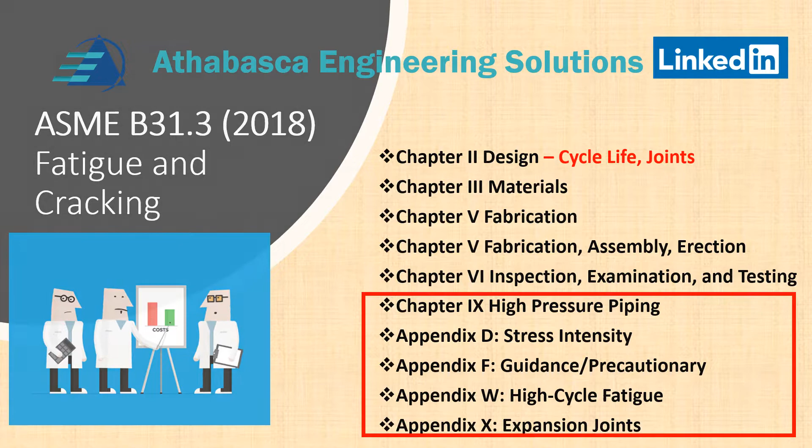So, pressure piping, we continue on with pressure piping, section K300 in 2018. They have a statement saying that for high pressure piping, you can use chapter 9 as an alternative to the rules discussed in chapters 1 to 4, which cover design, materials, and so on. When you dig deep into the specs, high pressure piping is generally defined as ASME class 2500 or higher.

They start off in K300.2 with the definitions. Recall that 300.2 is in chapter 1. Basically, they're saying K300.2 is exactly as 300.2, except for terms relating only to non-metals and severe cyclic conditions. So if you have cyclic conditions, the definition does change. In there, allowable stresses are used in lieu of basic allowable stresses.

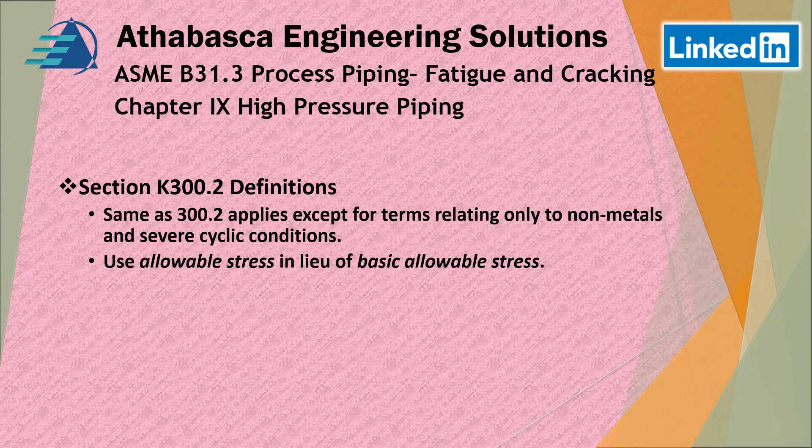So let's look at 304.8, fatigue analysis. When do we do this? What are the exceptions? 304.8.1 says suitability for fatigue analysis, exceptions to the evaluation. Maybe there are some exceptions so we can avoid the extensive work required. So when we have equipment that's duplicate or has a similar operating history, we don't need to do a fatigue analysis. If we have calculations that are very similar and have shown that it works, we can use those calculations. ASME allows that.

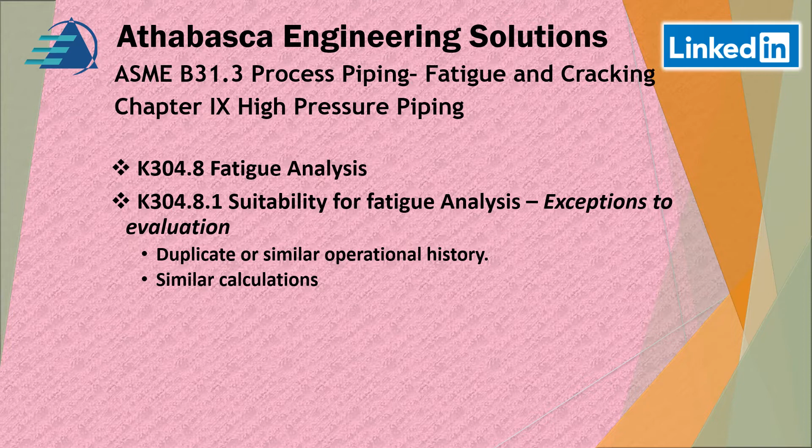On with 304.8. They talk about amplitude of alternating stress. Remember, we talked about if the amplitudes get higher and higher, and if they're not fully reversing, then that could be an issue. So this is what they say.

So you're allowed to go into the boiler pressure code, section 8, division 2, and use the rules there, in particular the design curve from part 2, paragraph 315. This hasn't changed in the last few years, so my reference point is 2018. They want you to follow part 5 for the analysis, or alternatively you can use section 8, division 3, article KD2, which I'm not familiar with, but I am quite familiar with division 2.

For additional considerations, you can use K302.1, but be aware there are a lot of precautions there. Going back to division 3, that's the higher pressure one, and we did some videos about when to use division 2 and division 3 and the issues associated with that. So anyways, we'll continue.

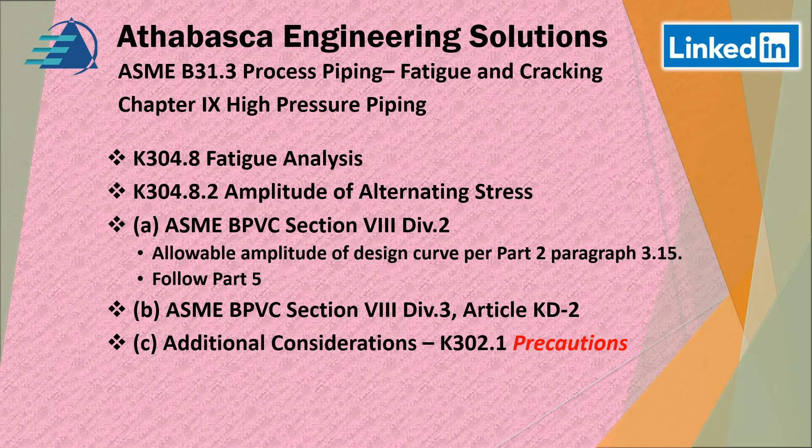So we are going into pressure stress evaluation for fatigue analysis. Straight piping, the stress intensity calculation, this is the calculation that can be used, and it's a modification of your standard hoop stress equation. Then for the stress intensity, you'd follow the ASME boiler pressure vessel code, section 8, division 3.

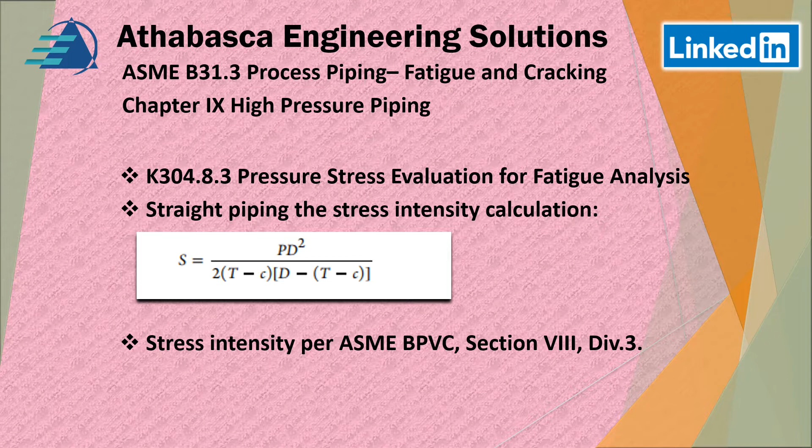The fatigue evaluation by test is an option. The fatigue life of a component may be established by DE, meaning destructive evaluation, in lieu of analysis. But you must follow the criterion in K304.7.2. So this is where you would get a lab involved, build components, and then run them under cycles if it's a complicated design. This is the pressure design of components.

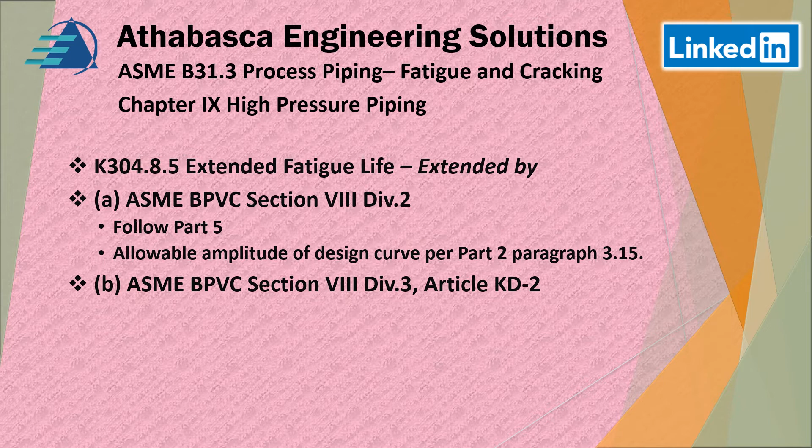So we continue. 304.8.5, extended fatigue life. It's extended by ASME boiler pressure vessel code, section 8, division 2, following part 5, allowable design curve part 2, 315. You can also go and use section 8, division 3, article KD-2.

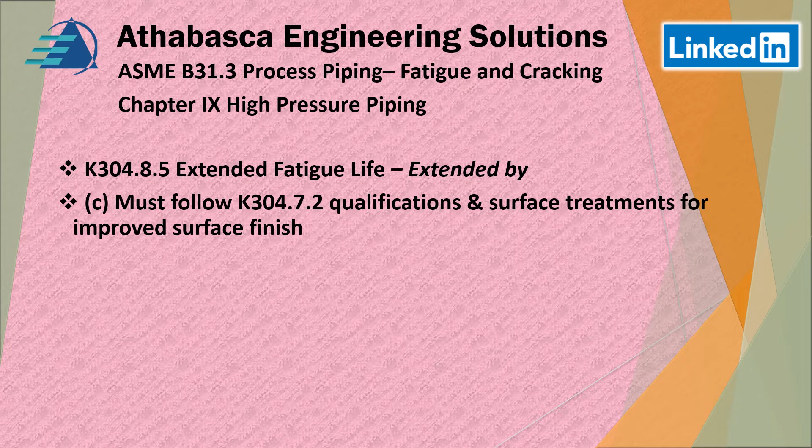You can extend the life by following 304.7.2, qualifications and surface treatments to improve the surface finish. The smoother the surface, the less chance there is of nucleation sites where cracks can begin, the stage 1 cracks. Pre-stressing components is a strategy. Autofrettage, shot peening, you're basically increasing the hardness of the surface, and you only want to do it at that surface, to reduce the chance of a nucleation site happening for a crack.

On the inside of the component, as we talked about in earlier videos, you want your material to have high toughness, but the surface you would like to have a very hard surface. Note that the pre-stressed surface treatments may be reduced due to thermal straining or softening. So you have to look at your application and evaluate whether your surface hardening will be able to handle the type of environment you're in.

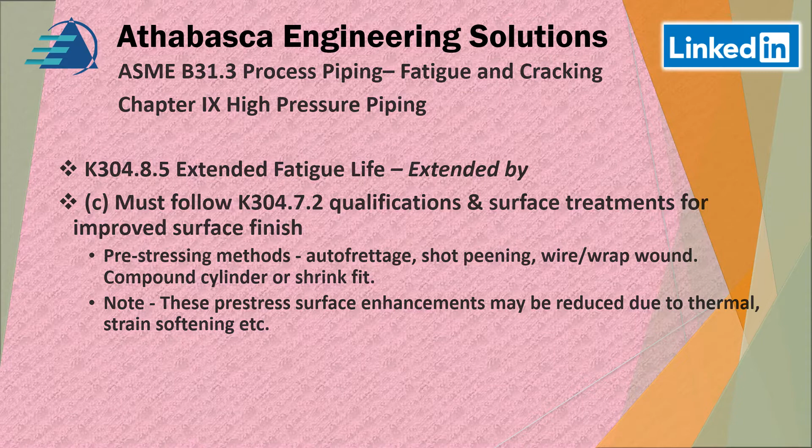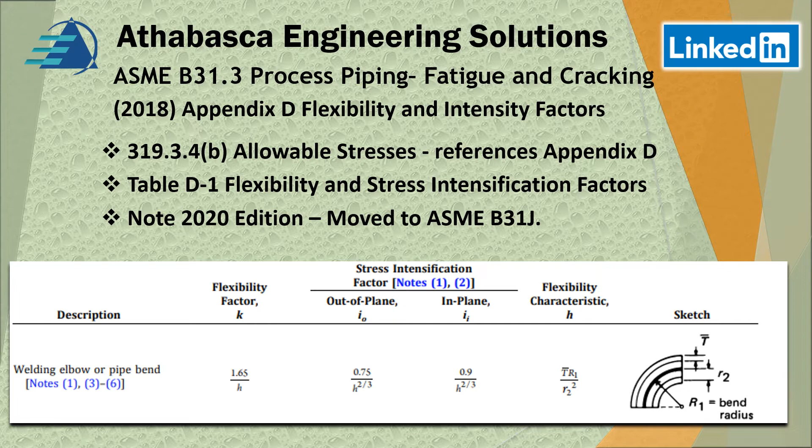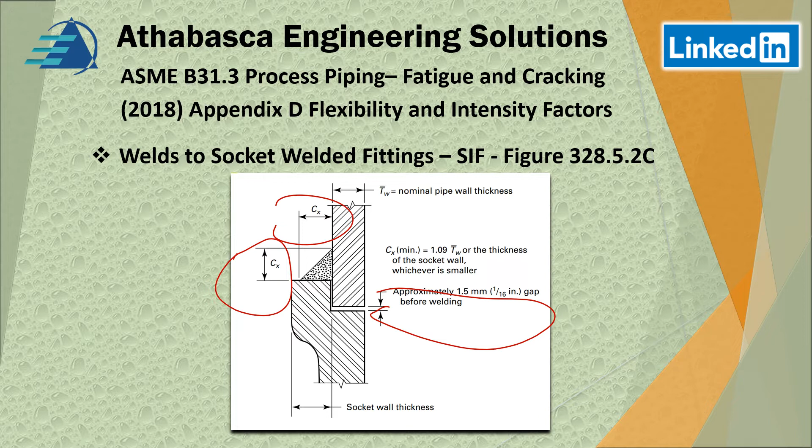Appendix flexibility analysis: welds to socket welded fittings, the stress intensification factor. They really want you to follow certain geometry factors and weld sizes to avoid potential fatigue. For example, you can see gap requirements and certain size requirements, and the legs of the weld are exactly the same size. There's very specific requirements for socket welding to reduce stress intensification factors, which promote fatigue and cracking.

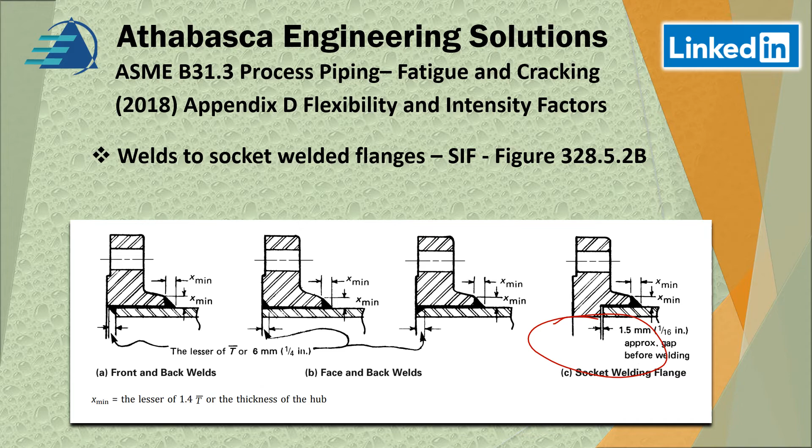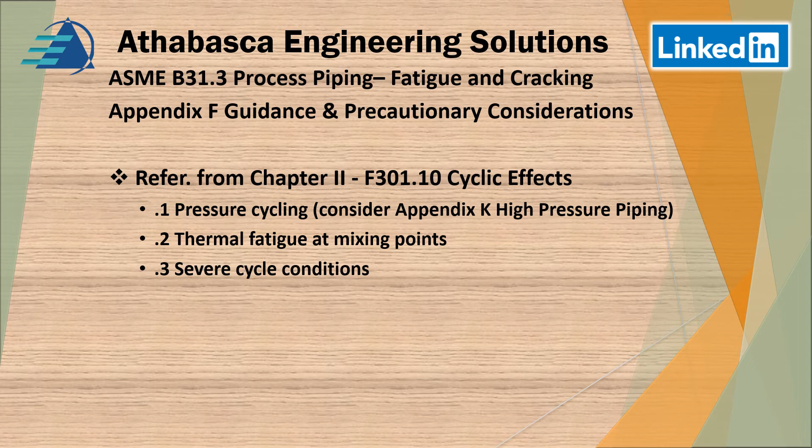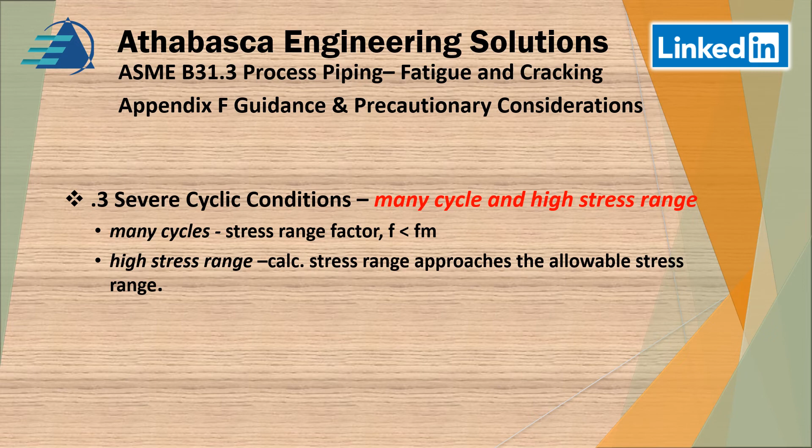Severe conditions have many cycles and high stress range. So when the stress range factor F is less than FM, as discussed earlier, then we have a high stress range calculation, where the stress range approaches the allowable stress range.

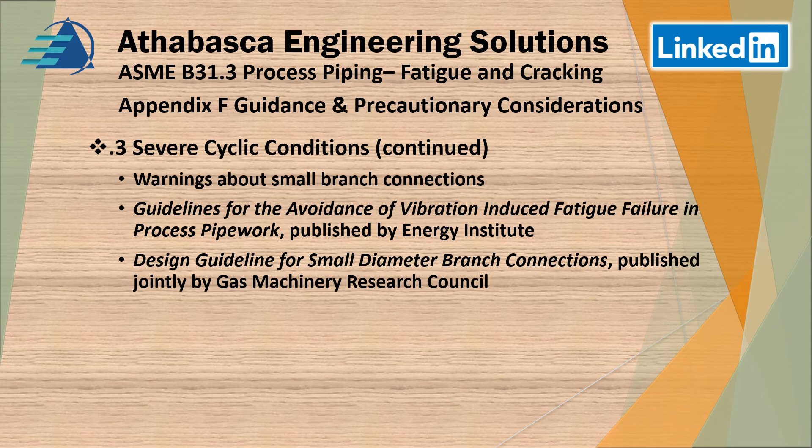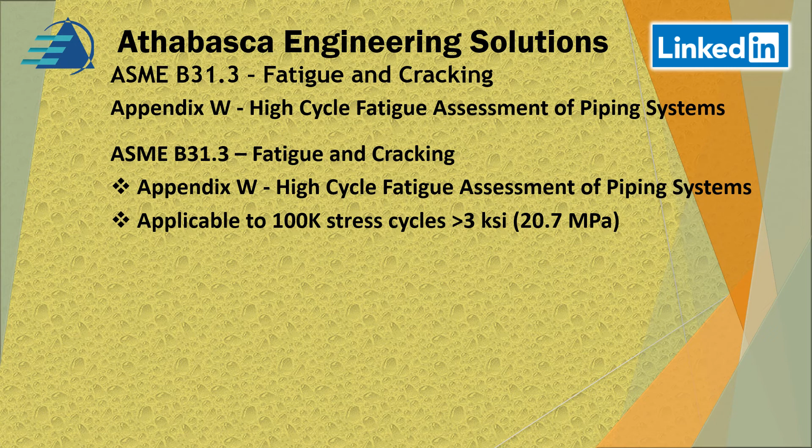Appendix W talks about high cycle fatigue assessment in piping systems. It's applicable to cycles where you've got over 100,000 cycles and greater than 3 KSI of stress in your part, which may be due to thermal expansion, anchor motion, vibration, inertial loads, wave motion, or other sources. It does not include pressure cycling; refer to Chapter 9 or ASME Boiler Pressure Vessel Code, Section 8, Division 2.

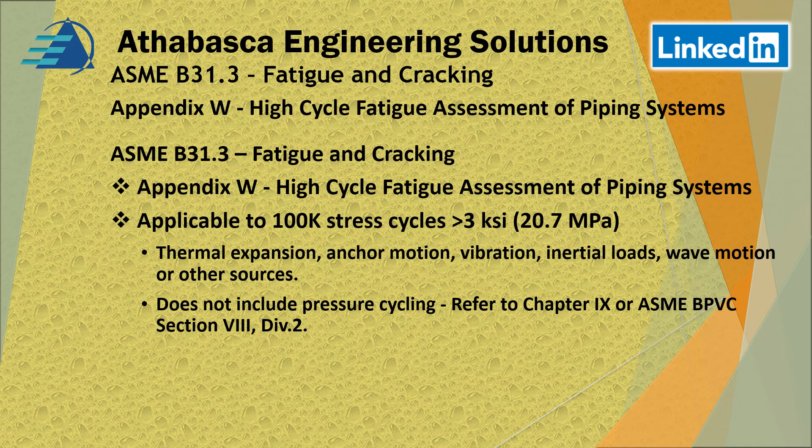Now we can continue on to a summary of Appendix X, which is very similar to what's described in other codes, but for metallic expansion joints. If you go to 302.1.3 fatigue analysis effects, basically it has to be done to ASME standards, and there are requirements to ensure you're designing to prevent fatigue.

Fatigue requirements are required per ASME standard, Appendix F. Then there's the fatigue correction factor, where 75% shall be used.